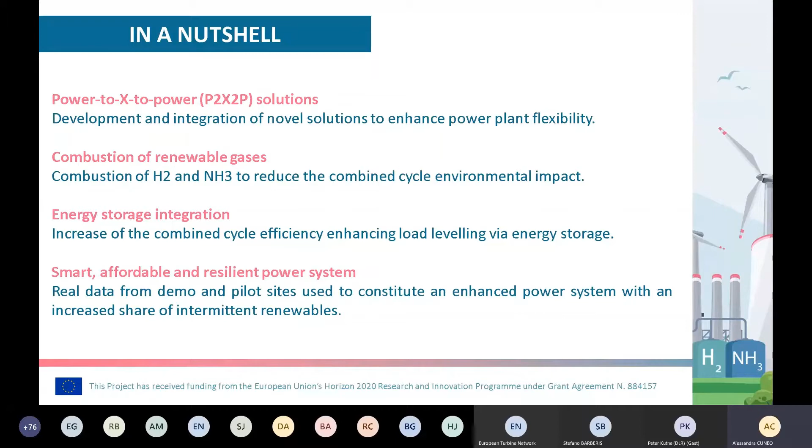So we will have either the hydrogen storage or the ammonia storage, depending on the solution. Of course, they will help to increase the efficiency of the combined cycle, because we are aiming at enhancing the load leveling via the energy storage. The project started in April, so we are in the very first phase of the project, and it runs for 4 years. So we will reach the end of the project in March 2024.

There are 21 partners involved from the GT manufacturing side, from the energy utilities, and from all the value chain related to hydrogen and ammonia, together with research institutes, etc. And the aim is firstly to start some tests on the combustion of hydrogen and ammonia, and then to have in 2022 both the pilot site related to the power to ammonia and the demo site related to the power to hydrogen ready, with the power-to-X solution installed and integrated in the plant, to have 1 year of monitoring of our solution.

So which are the drivers of the project? The drivers could be summarized in 4 main aspects. The first one is that natural gas is currently the backbone of the European energy system, and Europe is not yet independent, so there is a lot of interest to decrease the use of natural gas. So with this aim, we can demonstrate a cleaner solution that could be coupled to fossil fuel power plants.

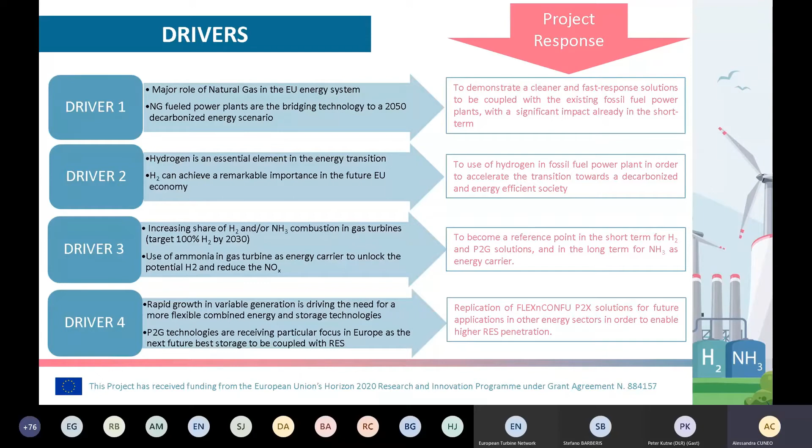And the last driver is related to the aim to increase the flexibility and promote the penetration of renewable energy sources. So making the power plant more flexible could help to have a more stable grid and increase the penetration of non-dispatchable energy sources into the grid, also considering the integration of energy storage in the power plant.

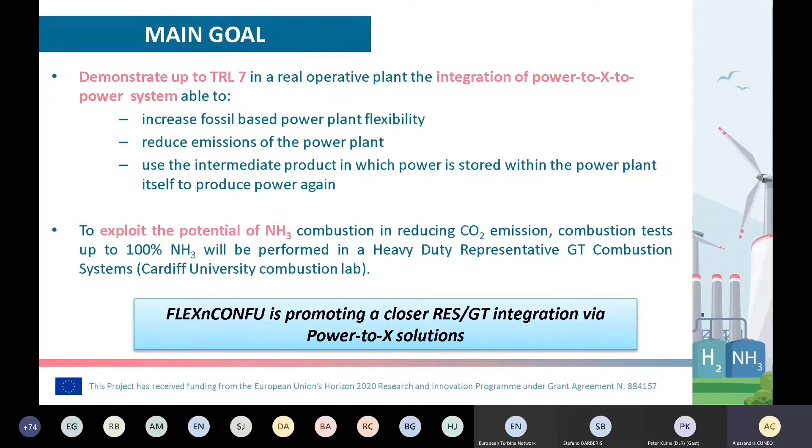So the main goal is to demonstrate up to TRL7, so in a real operative plant, the integration of a power-to-X-to-power system that could, on one side, increase the flexibility of the plant, and on the other side, reduce the emissions of the power plant, promoting the integration of power-to-X solutions in the power plant. The power-to-X system will be installed in a real operative plant, in a combined cycle that is working in Portugal and managed by EDP near Lisbon.

So the pillars of the project could be summarized in four main pillars. The first one is the use of non-conventional fuels in gas turbines, and several tests will be performed at Cardiff University, related to both hydrogen combustion and ammonia combustion. The second pillar is related to the integration of the power-to-X system in a real power plant, in which an electrolyzer will be connected to the plant for the production of hydrogen, and such hydrogen will either be directly stored and then burned in the gas turbine, or, in the power-to-ammonia system, be transformed into ammonia before its combustion.

The third pillar is related to the development of grid-oriented control strategies, because, of course, the power-to-X system should be properly controlled, considering the needs and the constraints of the energy markets, in an optimal way. So we have on board Mass Europe, which is one of the big companies in Europe concerning the control of power plants, that will closely work with other research institutes such as CIRCE to properly develop grid-oriented control strategies, which will be installed in both the pilot site and the demo site.

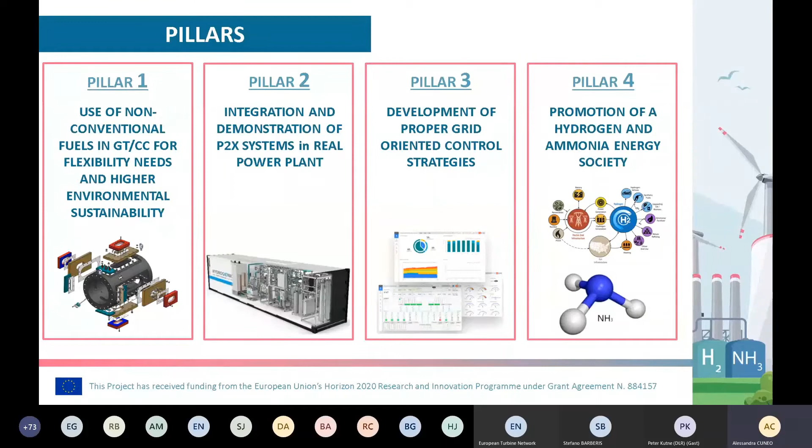And the fourth pillar is related to, as I said before, the promotion of hydrogen and ammonia towards a cleaner energy society. Demonstration of the project will be at 4 different levels. So we will have several combustion tests in a representative industrial scale gas turbine in Cardiff University.

Then we will have the demonstration in the Savona pilot site with the collaboration of the University of Genova, in which the power to ammonia system will be demonstrated at TRL6, integrating a small electrolyzer and ammonia synthesis reactor with an existing microgas turbine that will be properly modified to burn ammonia.

Then we will have the full demonstration at TRL7 in the Ribatejo power plant in Lisbon, managed by EDP, in which we are going to install a 1 megawatt electrolyzer for the production of hydrogen, and the hydrogen will then be directly injected in the combustion chamber.

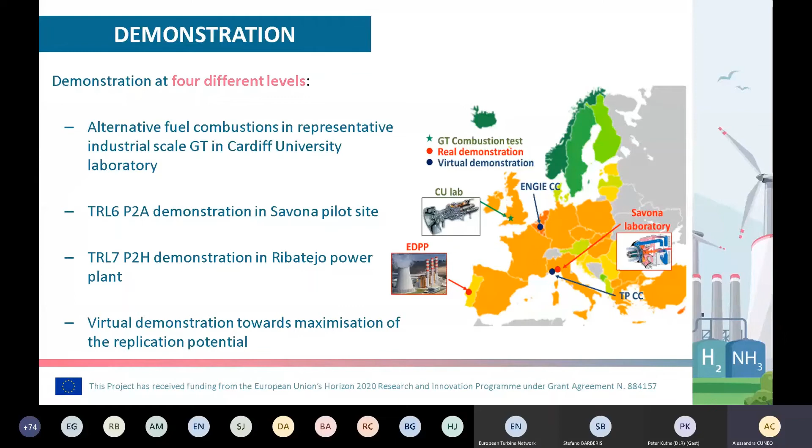But we have already engaged several virtual demonstration sites. One is Tirreno Power, which is a combined cycle in Savona in Italy, and the second one is another combined cycle managed by Engie, in which later on we will demonstrate the potential of the FLEXnCONFU solution in these two virtual demo sites.

So this is just a slide that will present you the work related to the combustion test rig at Cardiff University, in which several partners are involved to understand both hydrogen combustion and ammonia combustion. The focus will be more on the ammonia part, aiming to reach 100% ammonia combustion, and activities at the combustion test rig are led by Cardiff.

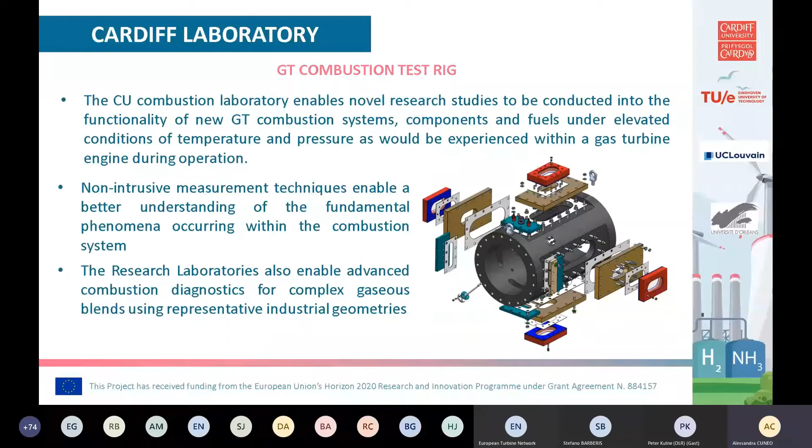In the Savona laboratory, the idea is to develop a modular and containerized solution and a small-scale ammonia reactor in order to increase the replicability potential of our project and to demonstrate the use of ammonia as a hydrogen carrier. The system will be connected to an existing microgas turbine in the University of Genova laboratory in Savona.

Here the main goal is also related to the modification of the existing microgas turbine, so the combustion chamber of the microgas turbine, to burn up to 100% ammonia. And in this pilot site, together with the University of Genova, there is Proton Ventures and the University of Darmstadt that will work on the ammonia synthesis reactor, together with ICI Caldaie that will manage the integration of the whole system.

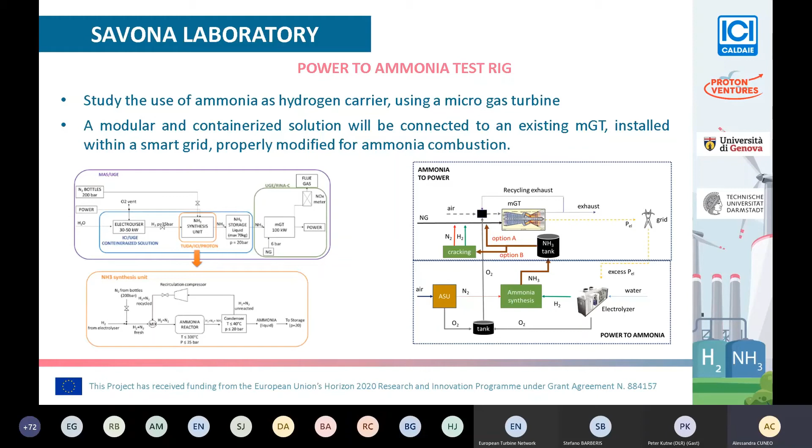While the complete power to hydrogen system will be demonstrated in the Ribatejo power plant, which is a 400 megawatt combined cycle, in which we are going to install a 1 megawatt fast cycle electrolyzer together with a gas compressor and pressurized hydrogen storage, in which the hydrogen will be produced based on the market needs and the market constraints, so starting from the excess electricity produced by the plant, accumulated in a storage and reused when it's more convenient.

And here we have Hydrogenics that will provide the electrolyzer and will work together with ICI Caldaie again for what concerns the hydrogen part and the integration of the whole system. And the plant, as I mentioned before, is managed directly by EDP.

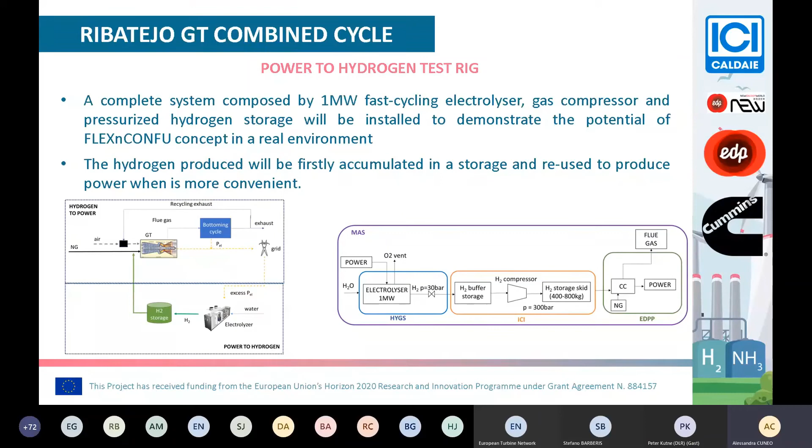And the last part is related to the control strategy. So dynamic models will be developed for both systems, based on reduced order models, and the aim is to develop controls that combine predictive capabilities while respecting, of course, the constraints of the plant. And the work will be mainly performed by MAS and CIRCE.

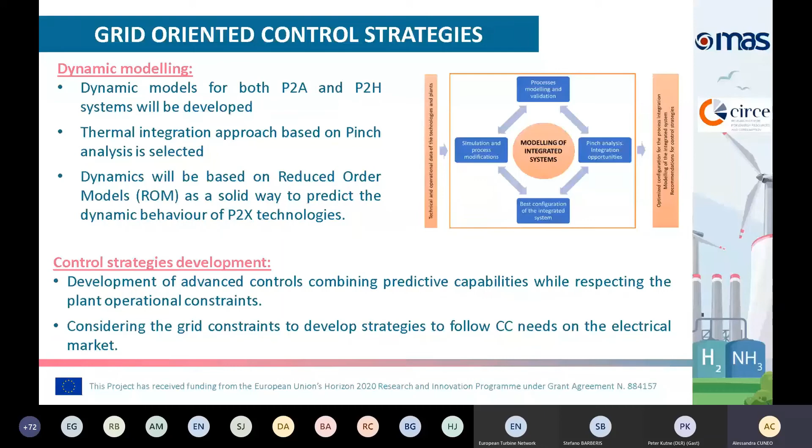So, which is the consortium? I already introduced you to some of the partners involved. It's a very industrial-driven consortium, and we are going to cover the whole value chain. So, considering energy utilities, gas turbine OEMs, we have the power plant operator.

It's a very large consortium, in which different partners will cover the different expertise needed for the development of this project. So we have research institutes, we have engineering companies, we have gas turbine manufacturers, and all the dissemination part is covered by ETN, which is one of the partners of the project.

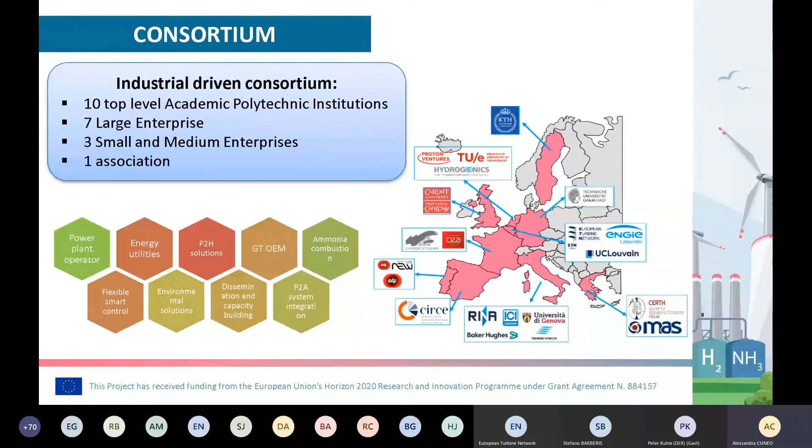The impact is related to demonstrating and contributing to a more resilient power system via the integration of energy storage. And the final aim is to load level fossil fuel power generation. And in this way, we aim to partially reduce the minimum technical load of the combined cycle and to increase the efficiency of the power plant itself.

So in the slide, you can see some numbers that we evaluated during the proposal phase, but of course, all of them should be demonstrated later on in the project, firstly via simulation, starting from the real data of the plant, and then in the demonstration phase that will start in 2023.